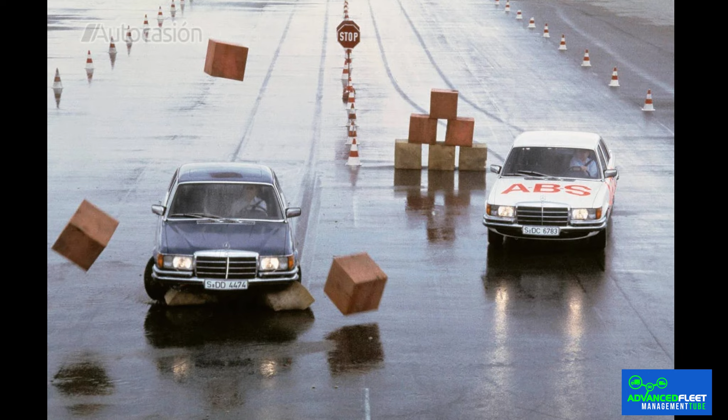The anti-lock braking system, also known as ABS, is an active safety feature in vehicles that has been present on the market for several decades. The first vehicle to incorporate this system, patented by Bosch, was a 1978 Mercedes-Benz. After an extensive period of testing and improvements, initially implemented only in luxury vehicles, it became mandatory in all new vehicles in the European Union in 2004.

The main function of the anti-lock braking system in vehicles is to prevent the wheels from losing traction and skidding, thus allowing the driver to maintain steering control. This is achieved through the integration of various components that make up this system. If your vehicle is not equipped with an anti-lock braking system, during hard braking, the car will experience a loss of grip and will not respond adequately to steering inputs, compromising the driver's ability to maneuver around an obstacle.

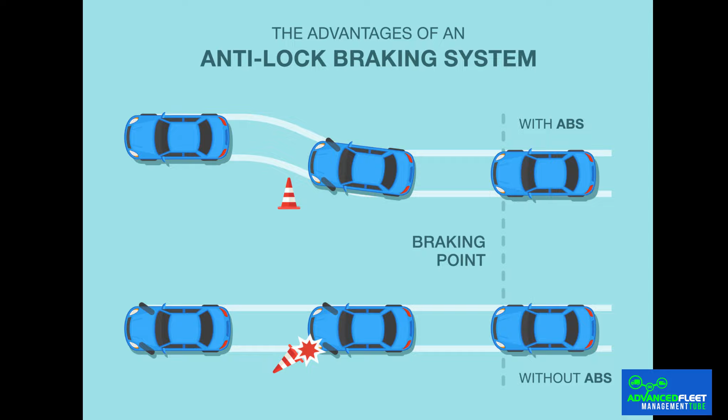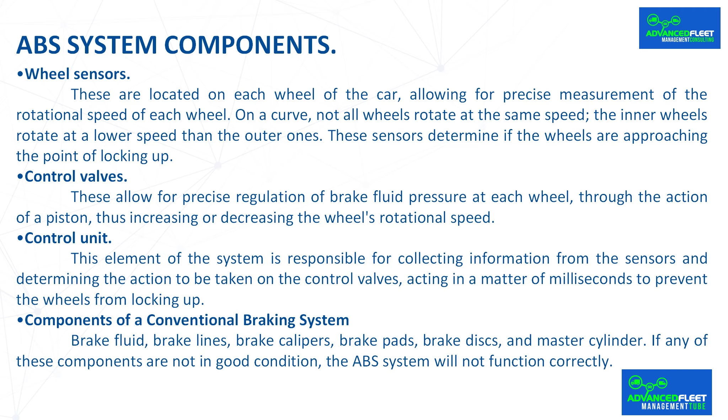ABS system components. Wheel sensors. These are located on each wheel of the car, allowing for precise measurement of the rotational speed of each wheel. On a curve, not all wheels rotate at the same speed. The inner wheels rotate at a lower speed than the outer ones. These sensors determine if the wheels are approaching the point of locking up.

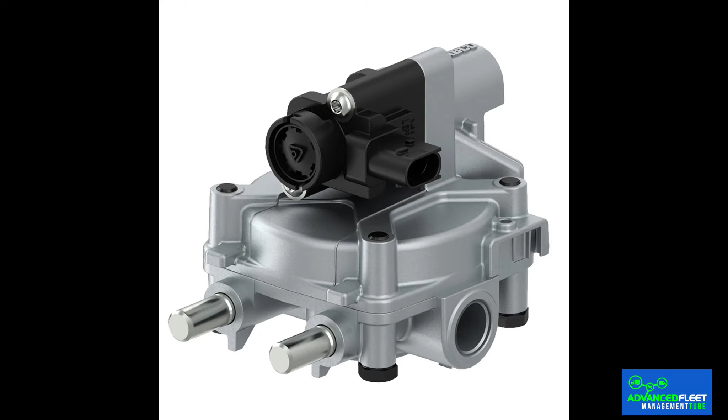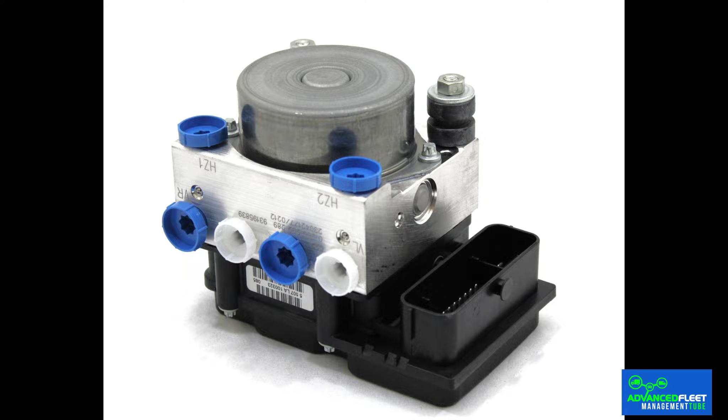Control valves. These allow for precise regulation of brake fluid pressure at each wheel through the action of a piston, thus increasing or decreasing the wheel's rotational speed. Control unit. This element of the system is responsible for collecting information from the sensors and determining the action to be taken on the control valves, acting in a matter of milliseconds to prevent the wheels from locking up.

Components of a conventional braking system. Brake fluid, brake lines, brake calipers, brake pads, brake discs, and master cylinder. If any of these components are not in good condition, the ABS system will not function correctly.

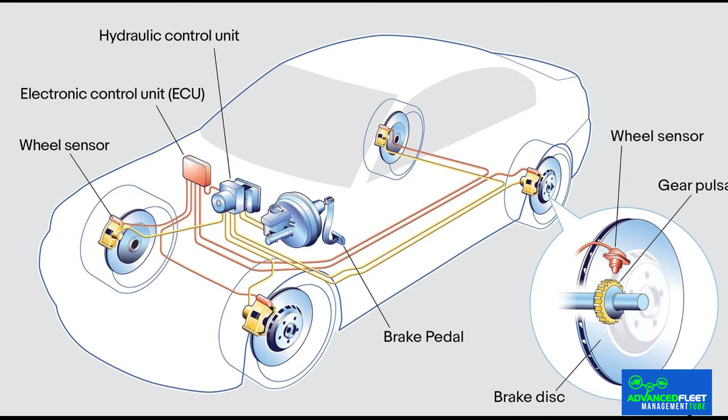How to brake when your car has ABS brakes. The drawback of older vehicles that do not have an anti-lock braking system is that the driver must manage the brake pressure properly. In the event of a wheel lockup, the driver is responsible for determining when to release the brake pedal and for how long to regain control of the vehicle. In a vehicle not equipped with an anti-lock braking system, the most effective way to prevent the wheels from locking is by repeatedly and rapidly applying the brake pedal, releasing it continuously. However, this technique is not easy.

In a vehicle equipped with the ABS braking system, the control unit determines the amount of pressure applied to the brakes to prevent wheel lockup. The driver only needs to firmly press the brake and clutch pedals simultaneously, while the anti-lock braking system takes care of the braking. If you feel a clicking or popping sound in the brake pedal and a slight rise and fall of the foot, do not panic and do not release pressure on the pedal.

ABS system breakdowns. This system is designed to withstand high mileage. However, various mechanical or electronic malfunctions may occur depending on the affected component. The most common are listed below. Faulty wheel speed sensors. If one of the sensors malfunctions, the ABS system will not accurately interpret the wheel speed.

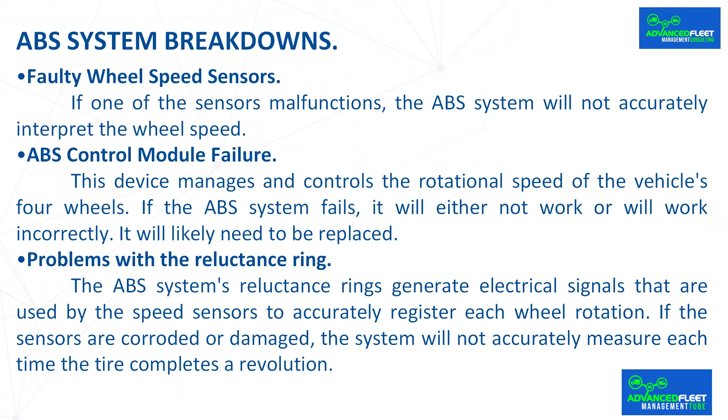ABS control module failure. This device manages and controls the rotational speed of the vehicle's four wheels. If the ABS system fails, it will either not work or will work incorrectly. It will likely need to be replaced. Problems with the reluctance ring. The ABS system's reluctance rings generate electrical signals that are used by the speed sensors to accurately register each wheel rotation.

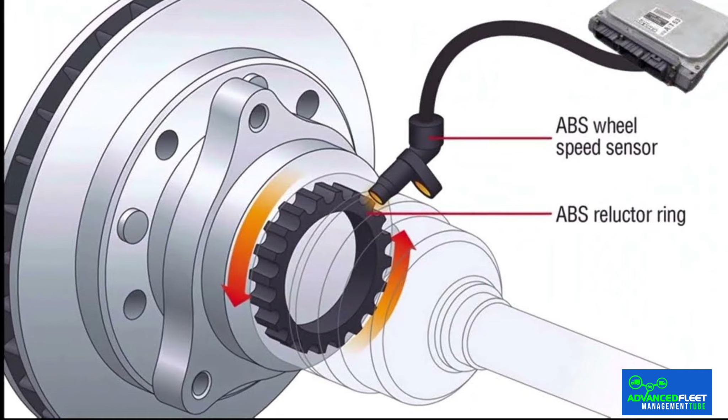If the sensors are corroded or damaged, the system will not accurately measure each time the tire completes a revolution. Control valve failures. If these valves fail, the ABS system may activate when it is not needed. Problems with the hydraulic system.

While the anti-lock braking system relies on the optimal functioning of the electrical system, if the mechanical parts, including the hydraulic system, are not in proper condition, braking capacity will be compromised and the ABS will not function efficiently. ABS pump motor failure. The anti-lock braking system uses a pump to generate hydraulic pressure. If the correct pressure is not applied at the right time, the brakes will not release properly, which could result in the driver losing control of the vehicle.

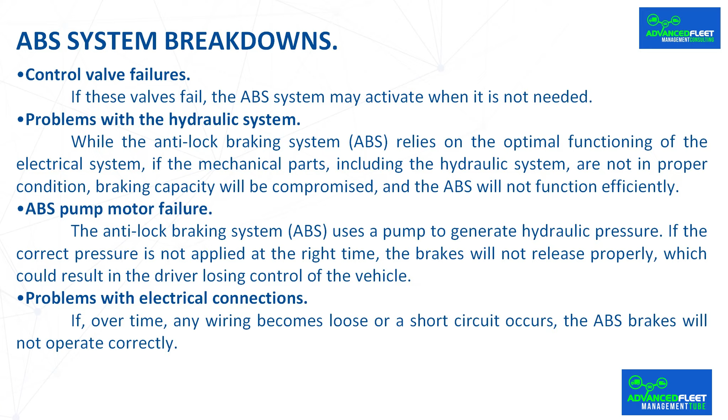Problems with electrical connections. If, over time, any wiring becomes loose or a short circuit occurs, the ABS brakes will not operate correctly. ABS maintenance. To avoid the aforementioned malfunctions, it is essential to maintain the ABS brakes at the intervals recommended by the vehicle manufacturer. It is crucial to check the brake fluid level and ensure it is in optimal condition. It is important that the system is free of any air bubbles, as otherwise, braking effectiveness will be compromised.

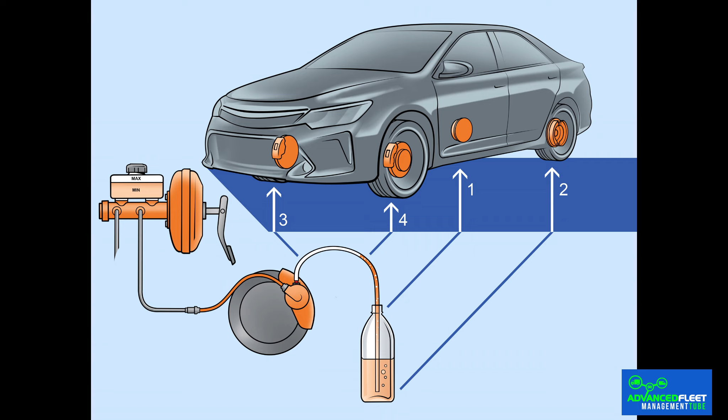Manufacturers recommend changing the brake fluid every 2 years to ensure optimal performance. However, it is recommended to consult the vehicle's manual for the recommended replacement interval. A vehicle's anti-lock braking system is a component that generally does not malfunction. If a failure occurs, the driver will be notified by a warning light on the dashboard indicating the system's condition.

Should this happen, it is imperative to take the vehicle to a workshop as soon as possible, as other systems, such as traction control and stability control, could also be affected. In fact, in more modern vehicles, it may even be impossible to start the vehicle if an ABS failure occurs.

How much does it cost to repair the ABS system? If the ABS brakes fail, it will likely be necessary to replace the valve body, the cost of which can vary depending on the vehicle model. Repairing this part involves an approximate outlay of €700, while replacing the valve body costs approximately €2,000 or even more, considering that labor costs must be added to this price.

Another component that can malfunction is the sensor. In such a case, the cost of the sensor would be significantly lower, around €50. To prevent ABS system failure, it is recommended to have the vehicle inspected regularly and not postpone maintenance. Implications for fleet management? The main consequence of an ABS failure is that the wheels may lock up during braking, resulting in loss of vehicle control and an accident.

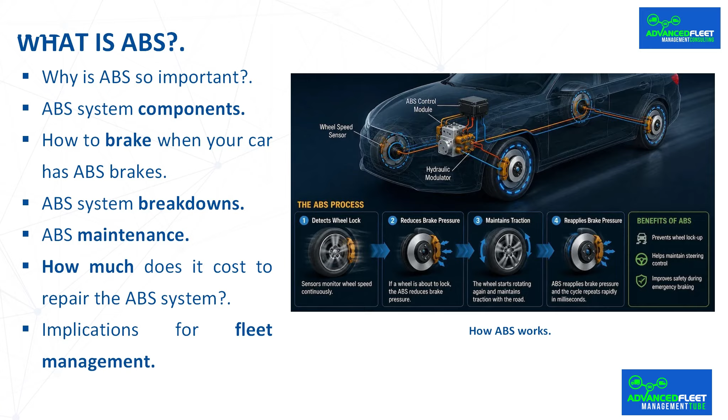The following measures are recommended. ABS maintenance. ABS maintenance must be performed according to the vehicle manufacturer's instructions and within the specified time frame. The brake fluid must be changed as specified by the vehicle manufacturer. Driver training. If the ABS warning light illuminates on the dashboard, the driver must inform our workshop manager or fleet manager, and the vehicle must not be used until it has been repaired.

Remote diagnostics. Using remote diagnostics, we can determine in real time if the ABS is malfunctioning. Premium replacement parts. ABS is a fundamental safety system. Always use original replacement parts or parts from premium brands. Never use low quality or second-hand parts. Vehicle purchase. In the European Union and the United States, ABS is mandatory. If ABS is optional in your country, it is always recommended to purchase it with the vehicle.